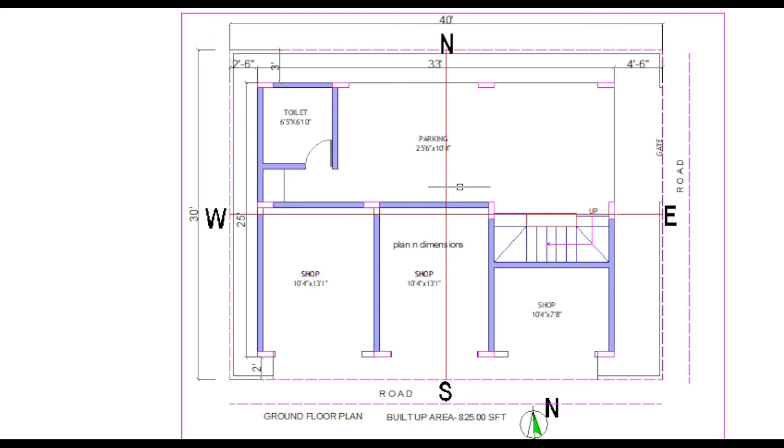In this video, let us discuss a 3 BHK plan with shop and parking area in a 30 feet by 40 feet plot size. Friends, this is a corner plot facing east and south. We have considered Dwajaya as our built-up area of 825 square feet measuring 25 feet by 33 feet. I have tried to follow all Vastu guidelines.

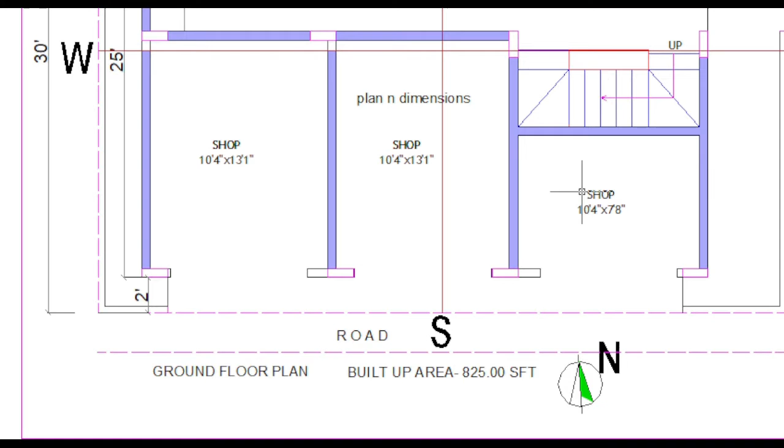In northeast towards north, we have parking area 10 feet 4 inches by 25 feet 6 inches. Towards northwest, we have a common toilet. Facing south road, we have accommodated 3 shops for commercial purpose. Now from this stage, in east-northeast, we move to our upper level.

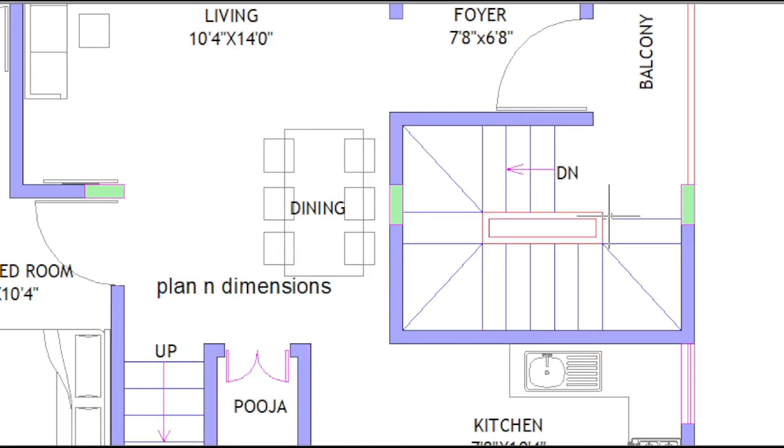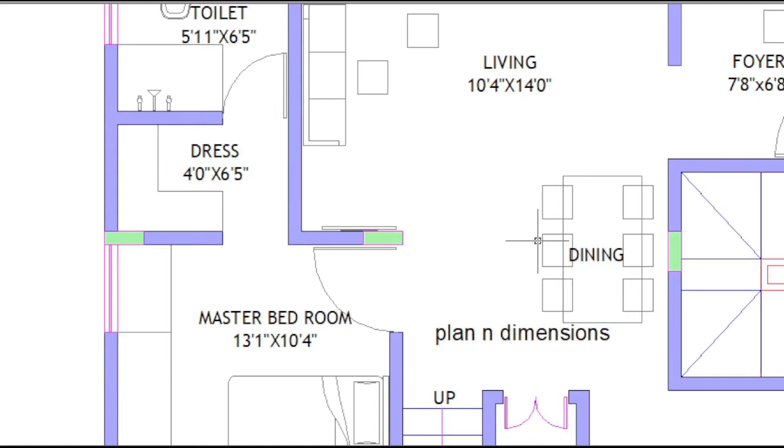From ground floor, we reach this area. We have main entry door in third segment from northeast, entering into foyer 7 feet 8 inches by 6 feet 8 inches. From this foyer, we have living 10 feet 4 inches by 14 feet. We can utilize this space for dining.

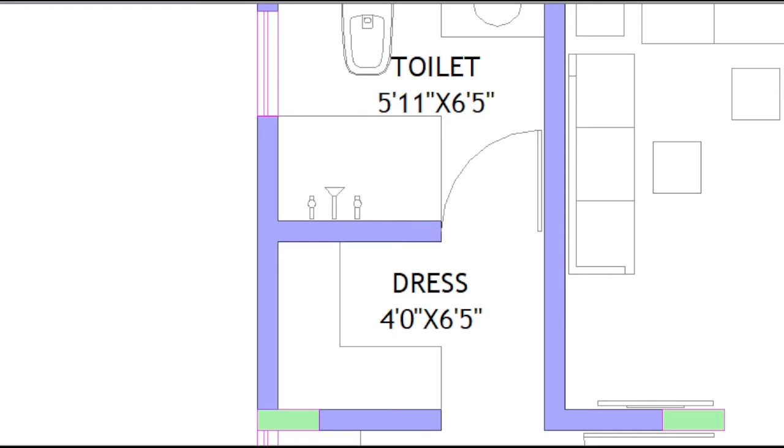Towards southeast, we have kitchen 7 feet 8 inches by 10 feet 4 inches. When we move towards southwest, we have bedroom number 1, 13 feet 1 inch by 10 feet 4 inches with dress and attached toilet in northwest. In south-southwest, we have internal stairs to second floor. Puja accommodated in this area.

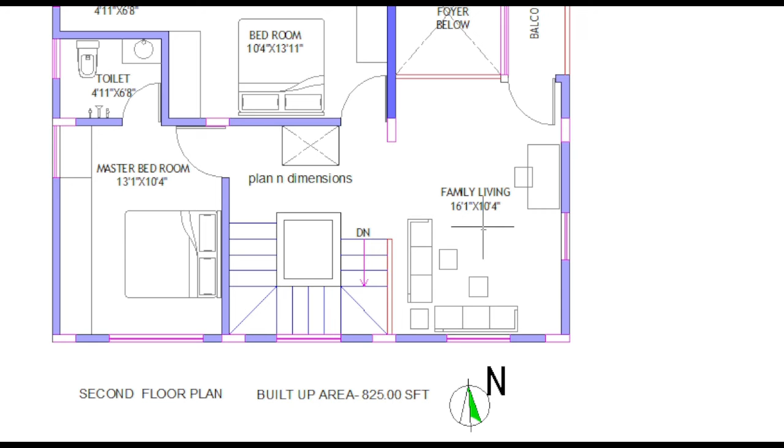We reach here to second floor. Towards east, we have family living 16 feet 1 inch by 10 feet 4 inches. From this living, we have cutout looking into our entrance foyer. For this family, we have balcony in northeast.

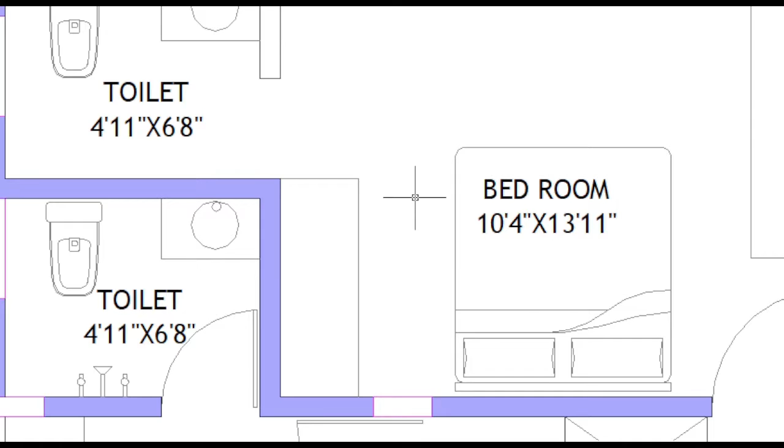Towards northwest, we have bedroom number 2 with attached toilet. Again towards southwest, we have bedroom number 3 with attached toilet. We have a cutout in Brahmasthanam open to sky. Friends, we have doors, windows, columns, all are in even numbers. Hope this plan will be helpful for you.